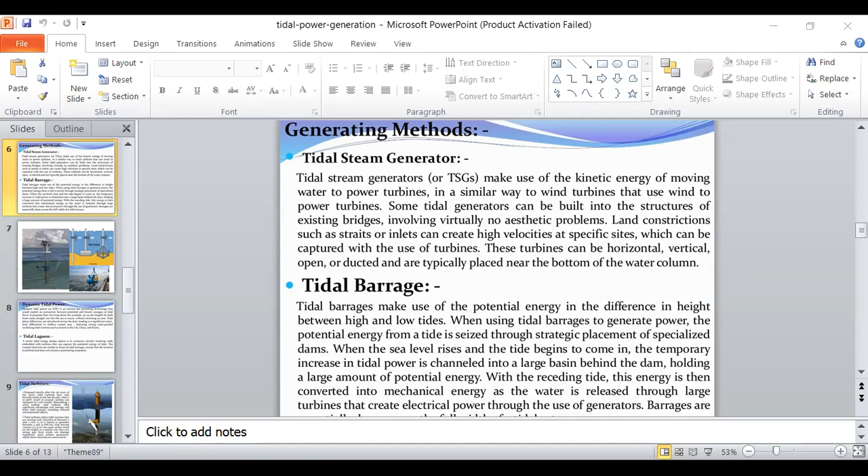Okay, who will tell me the reason behind that? So what is the reason behind that? What is meant by tides? How are tides created?

Okay, so listen once again. Tides are the rise and fall of the sea level. That means tides are the waves that are created by various physical or geographical changes happening on the earth or in the environment. That is like gravitational forces of the moon and changes in the moon and sun or lunar phases, etc. Because of these changes, the tides are created or waves are created.

Tides are nothing but the rise and fall of the sea levels, caused because of the combined effects of the gravitational forces exerted by the moon and the sun. We know that during the full moon, during the half moon, and during the no moon seasons, tides are going to change, and these factors are affecting the tides.

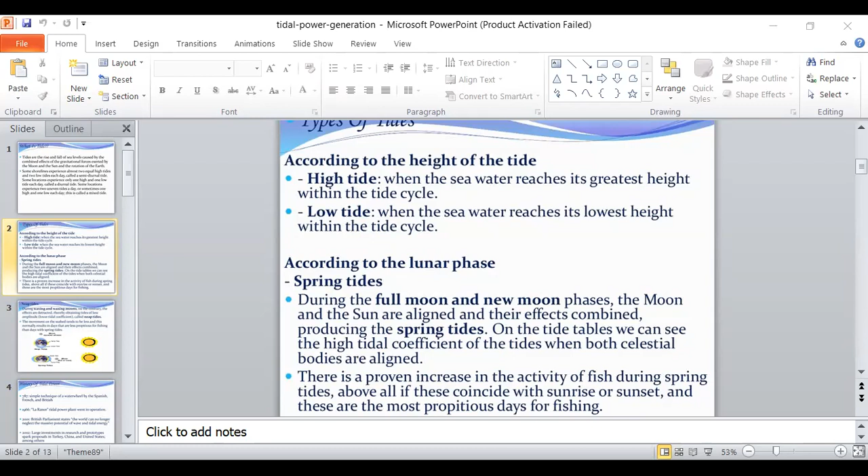The next point is the generation of tidal energy. How is tidal energy created?

Tidal power is taken from the Earth's oceanic tide. Tidal power is generated as waves flow from one side to another, that is, from higher potential to lower potential. Tides always flow from higher potential to lower potential, meaning whenever a tide is created, it spreads from the highest potential to the lowest potential, from the highest water level to the shorelines. This is the way of the tides.

Whenever the tide is flowing, the force created by that water is utilized for electricity generation. Tidal forces are created because of variations occurring in gravitational forces, and these gravitational forces are exerted by celestial bodies, meaning whatever bodies are available in space, such as the sun and moon. Because of these changes, tidal power is created.

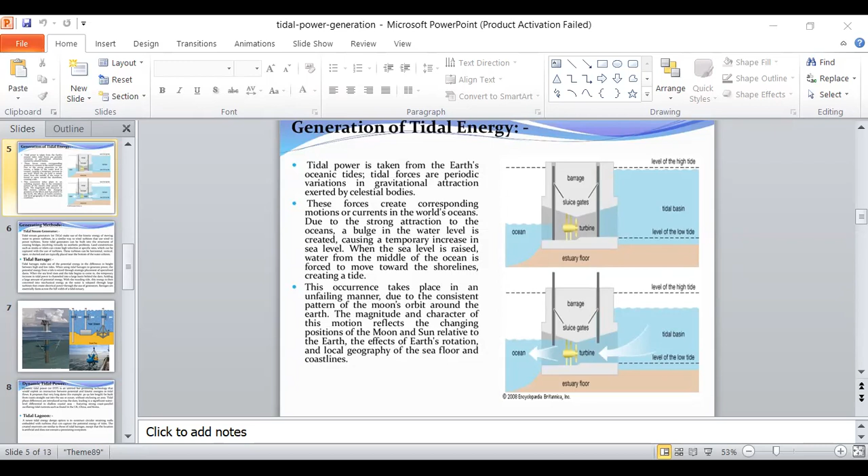So I will just show you one example so that you can visualize how stream power can be generated by using tidal energy. I will share with you one video regarding that.

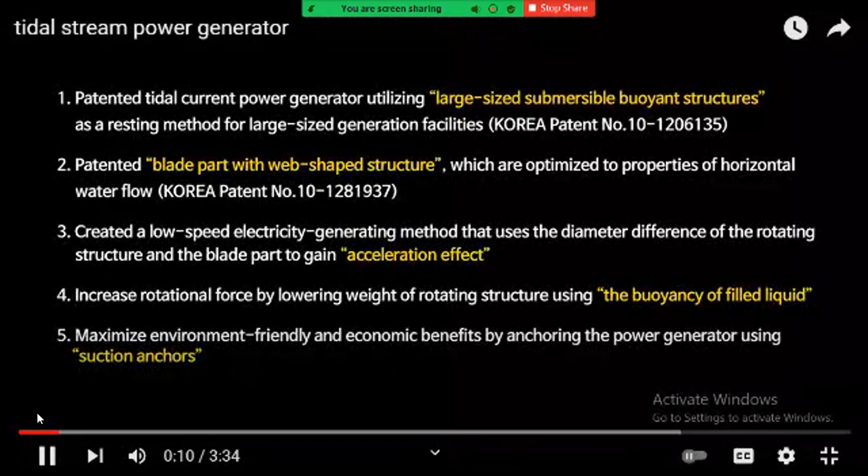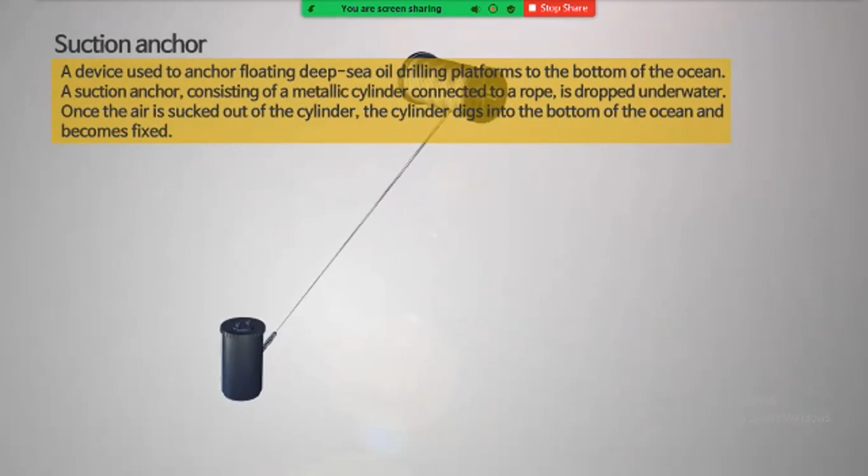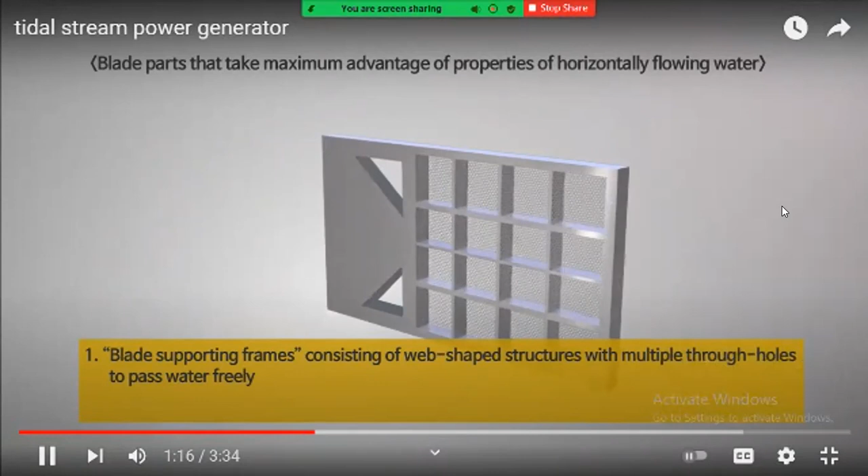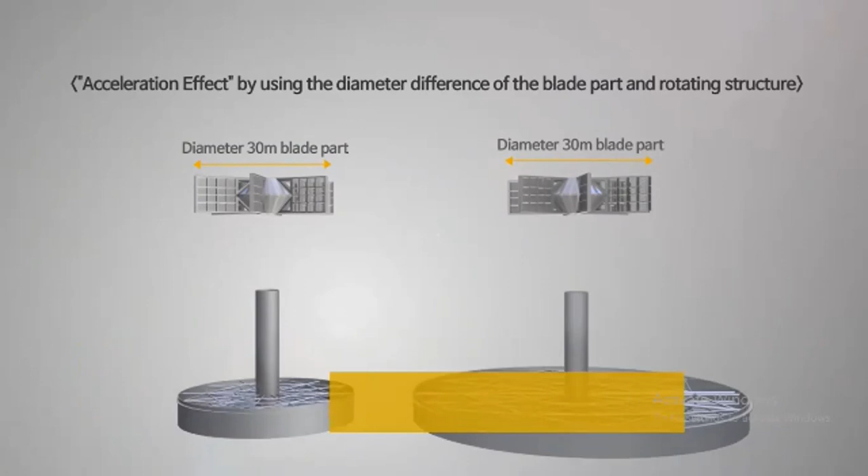Using suction anchors, BD Energy Korea's tidal current power generator is anchored, which was transported to the installation spot after it was built at a shipyard. Then, using ballast tanks, the power generator is submerged so that it produces electricity while moored underwater. The blades, designed with BD Energy Korea's patented technologies, smoothly open and close according to the flow of water and acquire rotational force with minimum resistance. By increasing the diameter of the rotating structure, it acquires the same acceleration effect without the use of a separate accelerator.

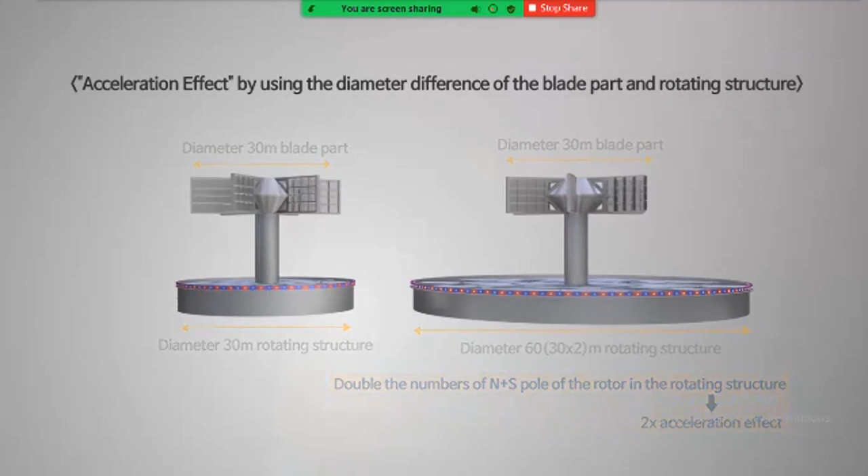Okay, so the structure of the stream generator is shown in the video. You can see how, whenever the tides are flowing, the turbine moves like this, as shown in the video.

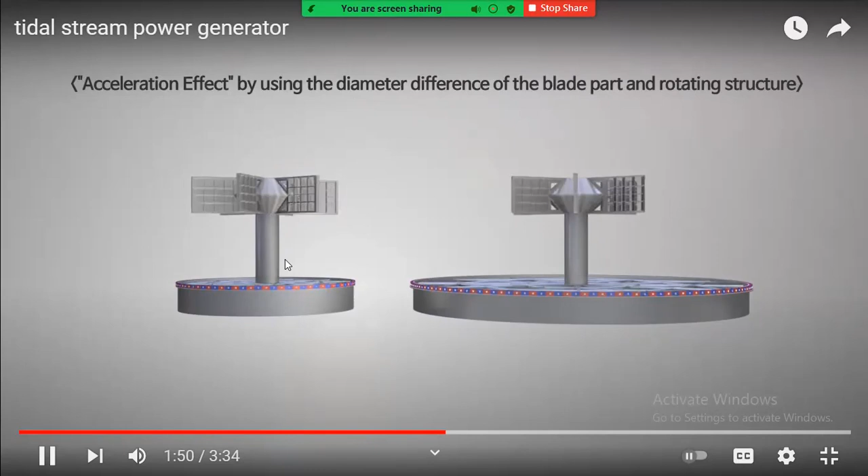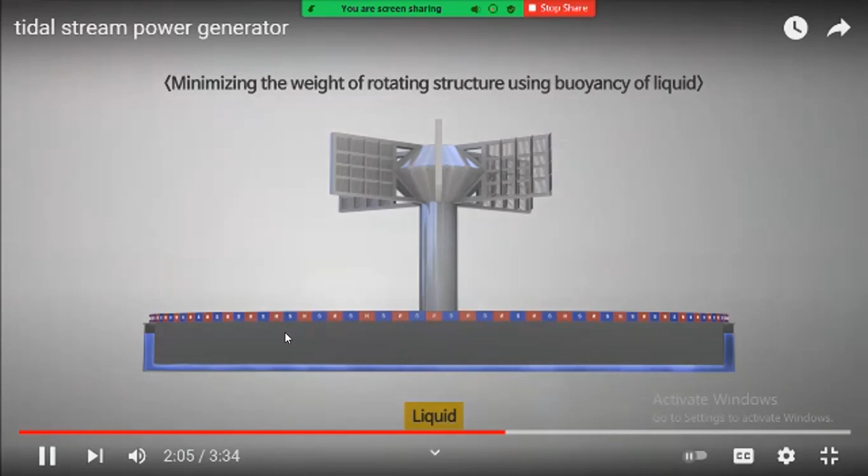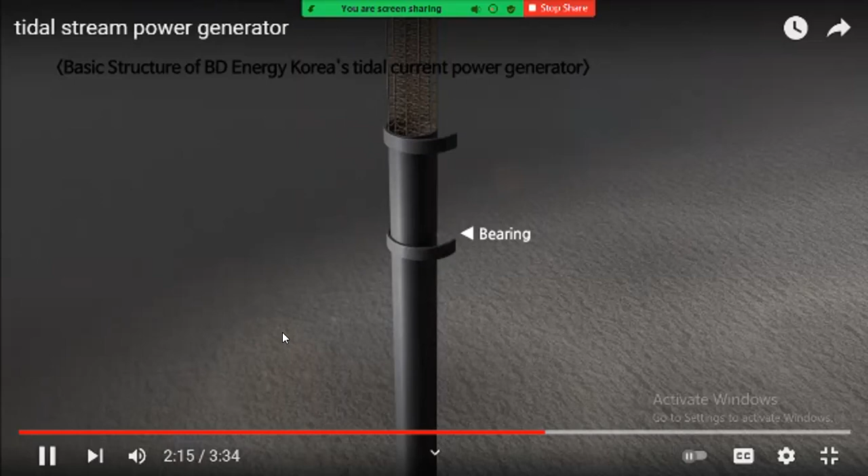To overcome the weight limitations from the increased size of the rotating structure, it is designed to be made of buoyant parts and to rotate while floating on the filled liquid. The extension axis between submersible buoyant structures serves as the support beam for rotation. Built using a truss structure, outside the extension axis between submersible buoyant structures, bearings are connected.

And outside the bearings, the central axis - okay, so the basic structure should be made like this. The central axis rotating structure should be placed inside the bottom of the water, so that a supporting structure can be created for placing the turbine.

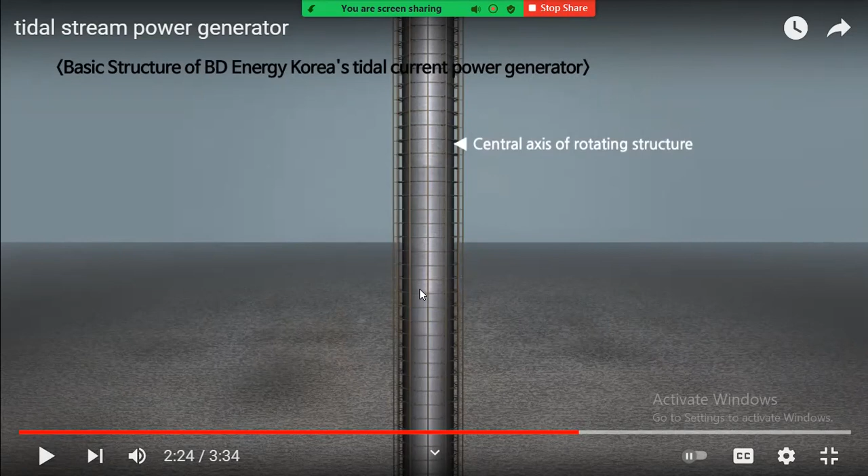The rotating structure, which consists of a truss structure, is connected. On the central axis of the rotating structure, two blade parts and the rotating structure made of buoyant parts are connected into a single structure, and electricity is generated through the interaction between the rotor and stator.

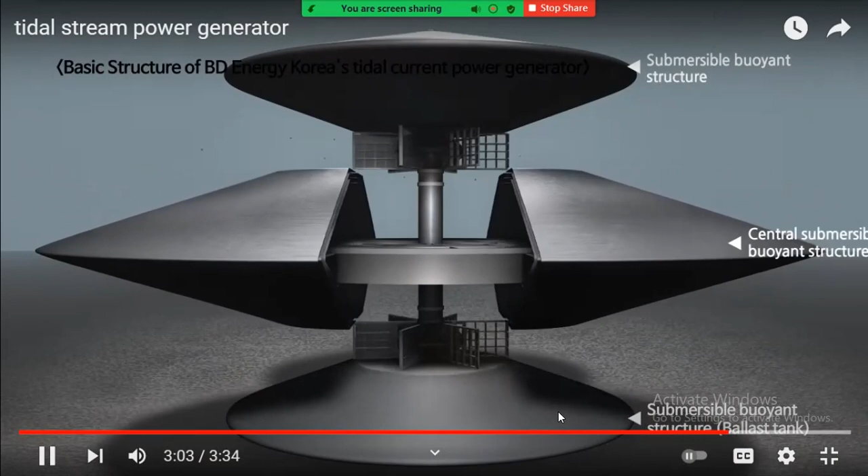Multiple pillars between - so whatever components are there, like motors or structures for further processes, those parts are enclosed by a submersible enclosure. Buoyant structures reinforce the outer structure, making it easy to increase the size of the central submersible buoyant structure.

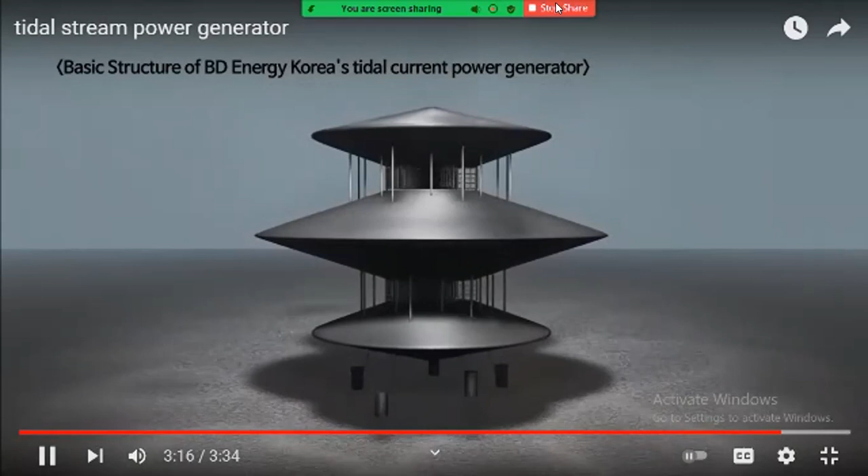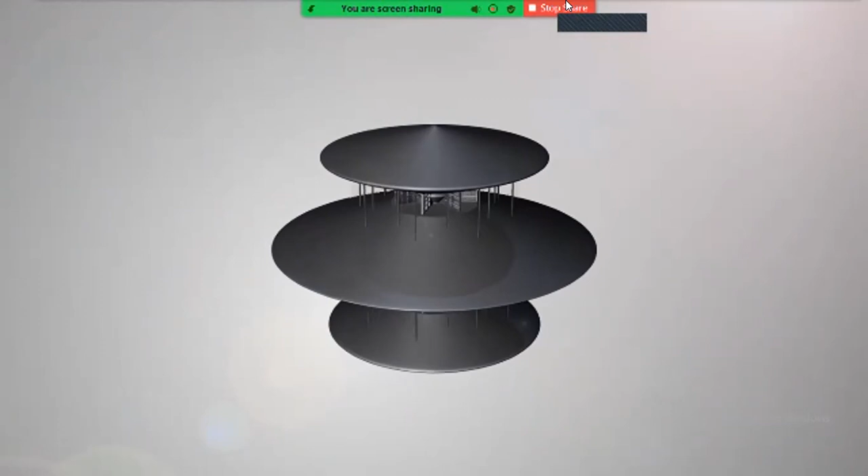A screen on the outer perimeter of the pillars prevents the infiltration of foreign matter. BD Energy Korea's tidal current power generators will become part of your life as a next generation generator.

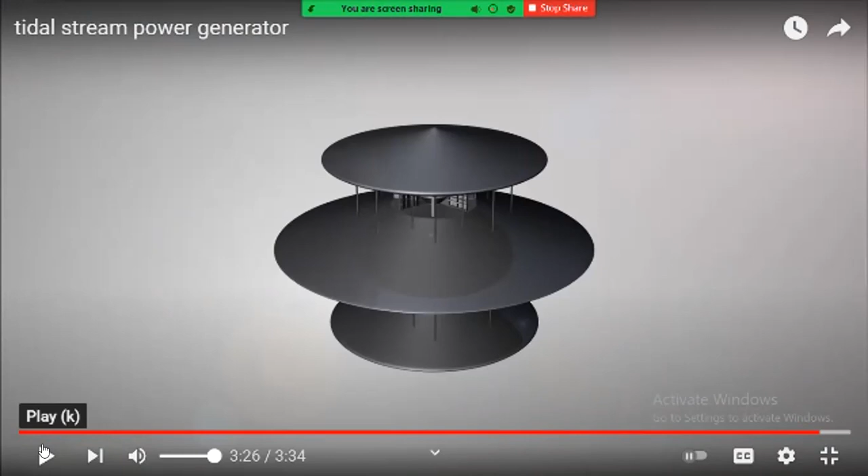So here you can see a net is connected where the water flows through this part. Whenever that net is connected, it will not harm the fishes that are available inside the water of the sea, and it helps avoid unwanted components or protect the turbine from major damage. Because of that reason, the net is connected here.

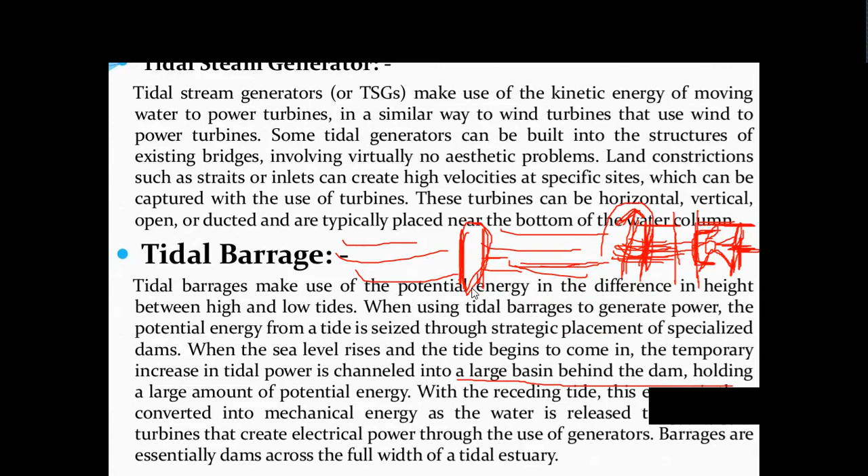So again, I will share with you one video so that you can visualize the actual process of the tidal barrage. What is the exact process of the tidal barrage?

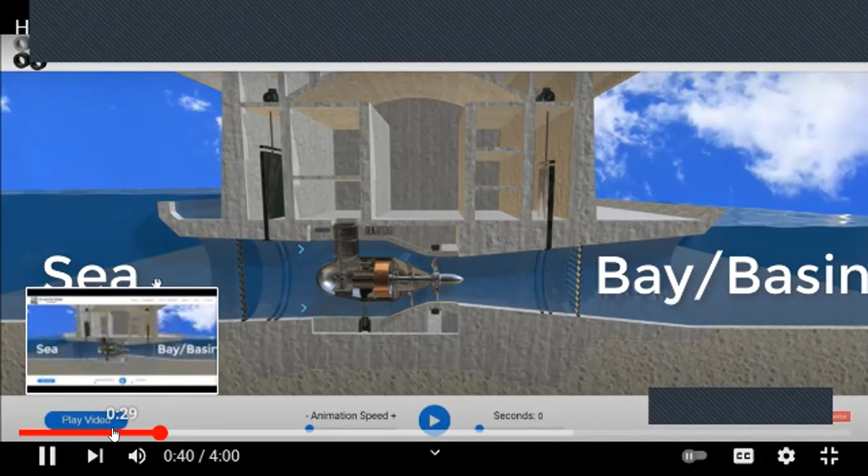There is very little flow from the seaside to the right hand side until we push play. In this image you can see seawater is stored here, and here one type of basin is created, with a barrage or structure built between them. Water should be collected at this level, and we'll see the height of the water at the left side. Whenever that water level is getting increased, this gate should open up. You can see it in the video.

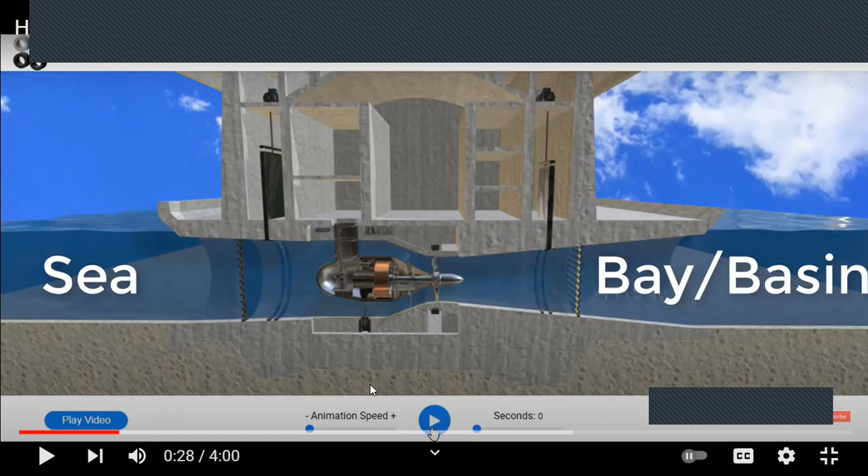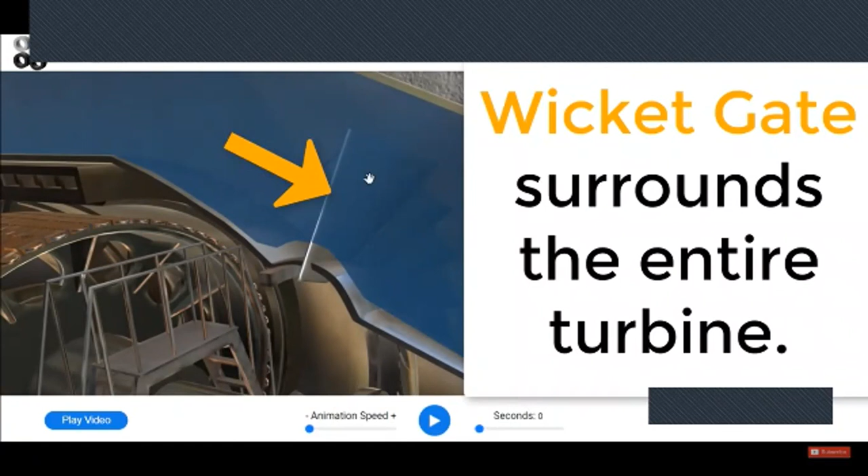Animation in action: notice the tide on the left is now increasing slightly. I'm going to pause it there. There is no flow, or very little flow, from the seaside to the right hand side or into the bay area. The reason is this wicket gate, the area just here, behind this blue piece. This is called a wicket gate. The wicket gate was closed, so there can be no flow from the sea to the bay or estuary area.

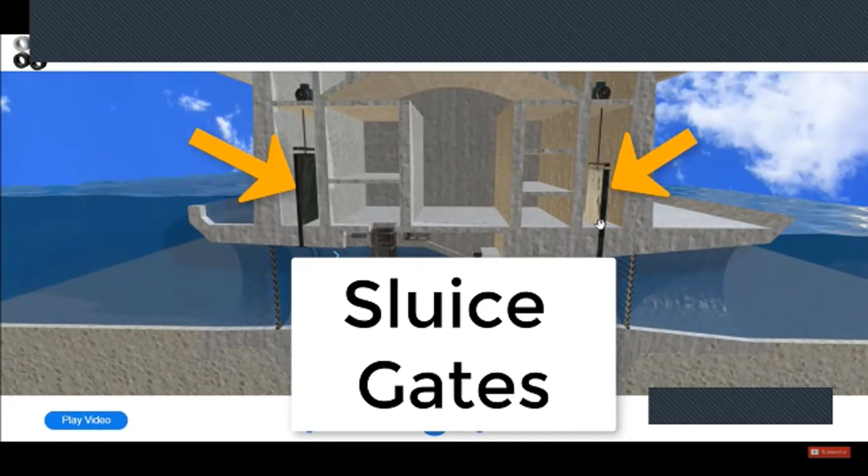Notice that you can also close these gates here; this is called a sluice gate, and there's another sluice gate on the right, which will completely isolate the turbine hydraulically, meaning there is also no flow. But the water level has increased here—it's at a higher level on the seaside than on the bay or estuary side.

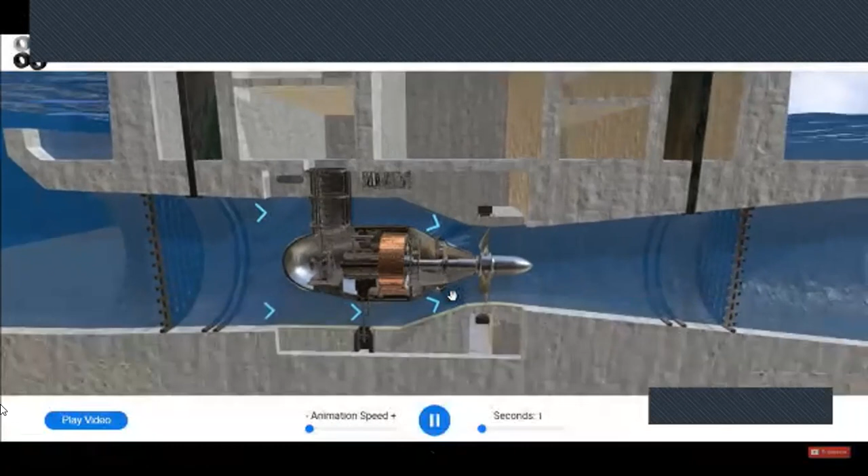If I push play, the wicket gate has now opened and we're getting flow. You can see the wicket gate here is just open, and we're getting flow now coming across. You can see here, whenever that water is flowing from the left to right, the turbine starts rotating.

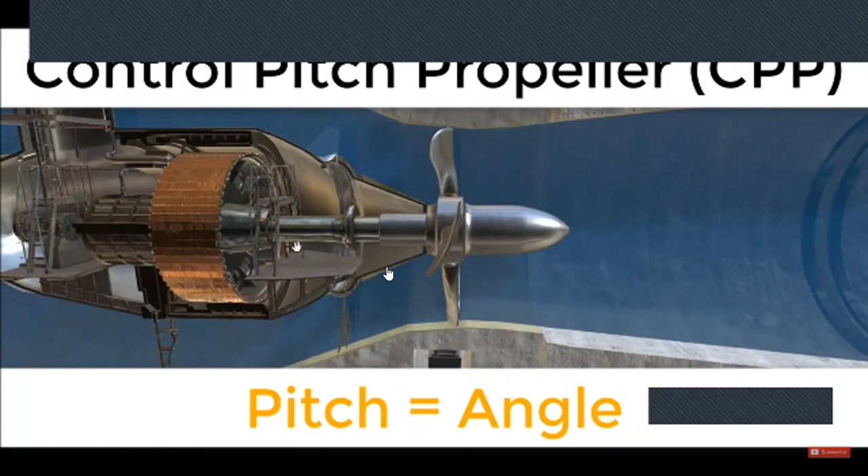This bulb turbine—this is a cross section of a bulb turbine—is imparting thrust upon these propeller blades here. This is what we call a control pitch propeller, and we're turning the turbine. The turbine turns the generator and we generate electricity. Notice these blades change position so that we can generate electricity in two directions.

The water level, I'll just pause it here a second, is now equal. The sea or tide is up, at its high point, so the tide's in and the bay is full. We can't get any more water into the bay, so the water level between the two equalizes.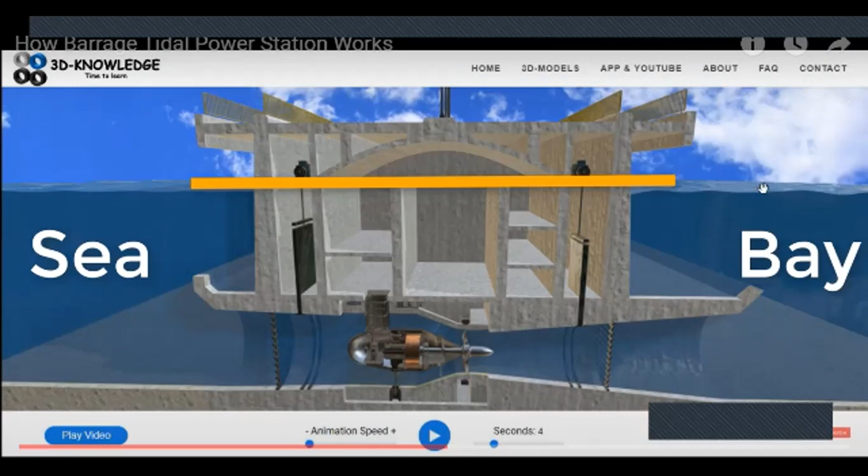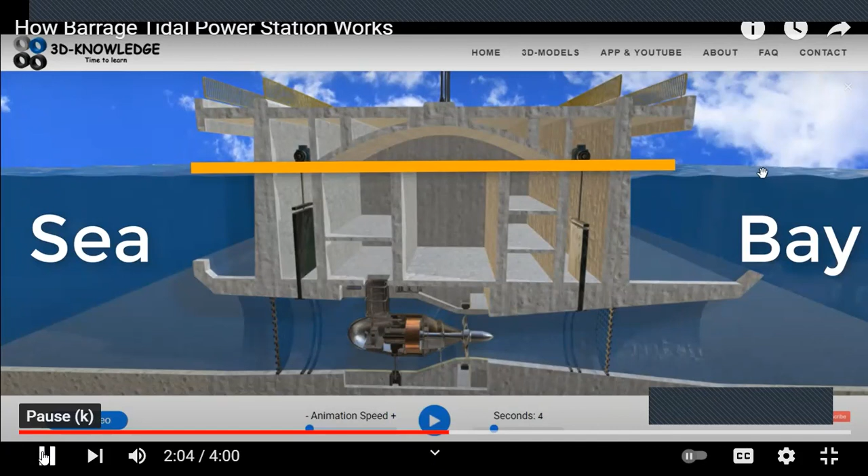So we can't get any more water in the bay. Here you can see the water level of both the bay and sea is equal, so these gates are closed and water is not flowing through them. Whenever the water level increases, either from the sea side or the bay side, and that difference is greater than about 2 meters compared to the other side, this gate should open. The water level between the two sides is equal, so there's no flow because there's no pressure differential between the two sides.

However, once the tide begins to recede on this side, we can leave the wicket gate closed until there's at least 2 meters difference in height or head of pressure between the sea and the bay area. Once we have that 2 meters, that's sufficient flow to drive the turbine, impart thrust upon the blades, drive the turbine and generate electricity.

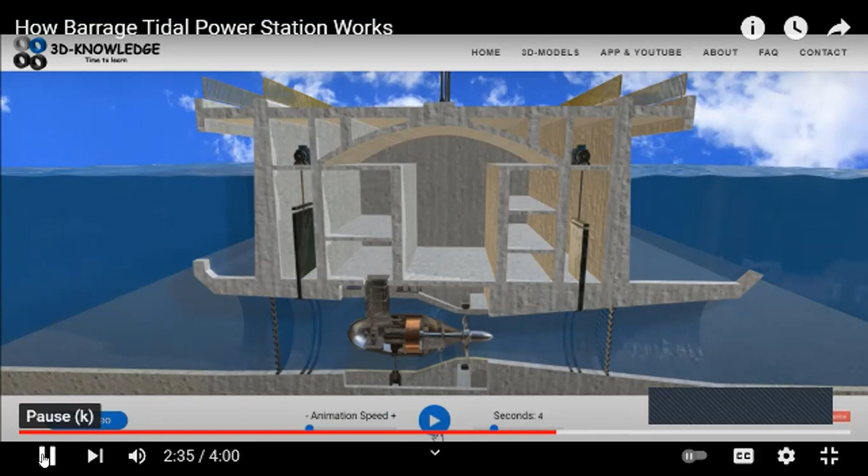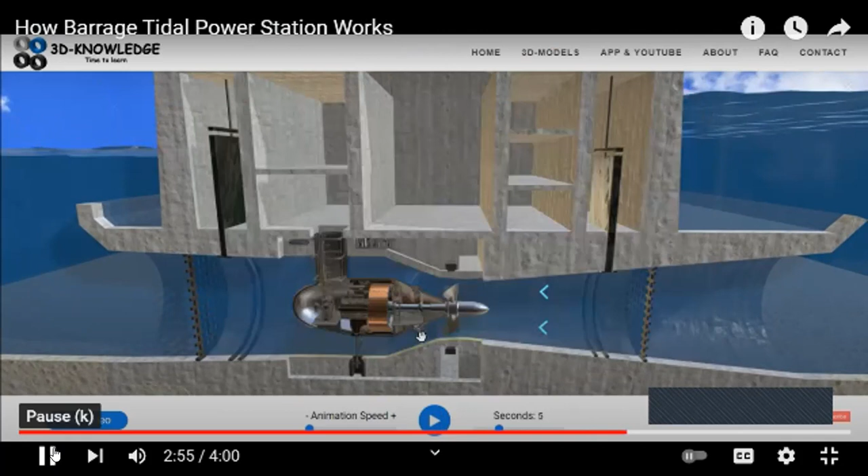Let's play the animation again. Hopefully in a minute we'll see the water draining out from the sea side. Here we go, it comes down. Notice there's no flow. Keep an eye on the wicket gate. The wicket gate is now open because there's sufficient difference in height between the two levels, meaning sufficient flow will occur once we open the wicket gate. The blades should also be adjusting position.

We'll see that now. Notice they're spinning around. This is because we want to impart maximum thrust onto the blades as the water's flowing across, and to do this we have to adjust the position of these blades. That's why they call it a control pitch propeller — when you adjust the position of the blades, you're adjusting the pitch.

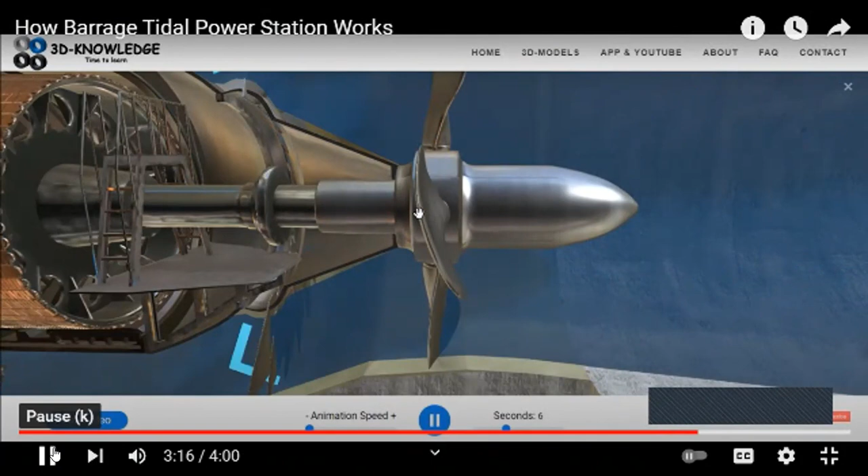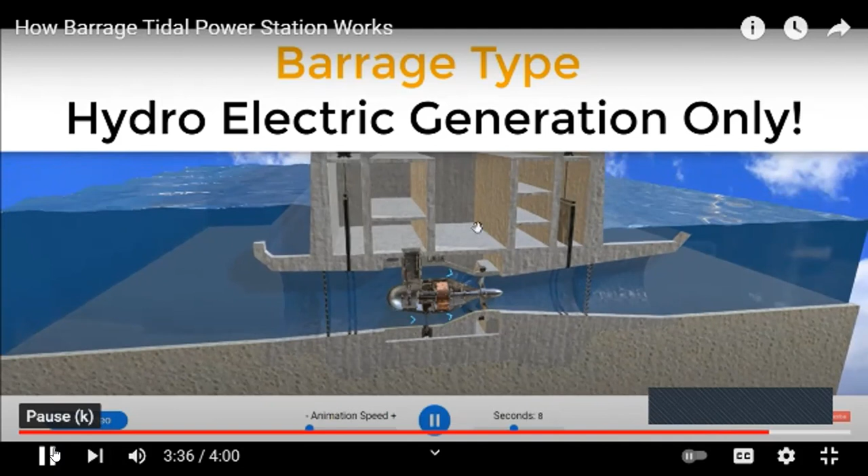Again, the flow has stopped because the water level on the two sides is equal. You'll need at least 2 meters difference between the two sides to generate electricity. That is essentially how hydroelectric generation works — a relatively simple process. You're artificially controlling the difference in height between the two water levels in order to get a high flow from one area to another until the pressure is equalized, and then we use that high flow to generate electricity.

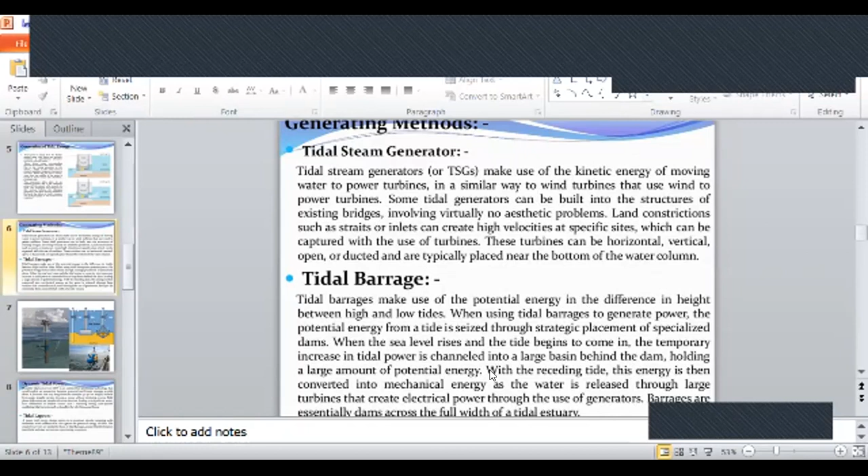Okay, so this is about the tidal barrage you've seen in the video, and an explanation regarding this has also been given to you in the study session. If anyone has a query regarding this, they can ask me. Is anyone having a query?

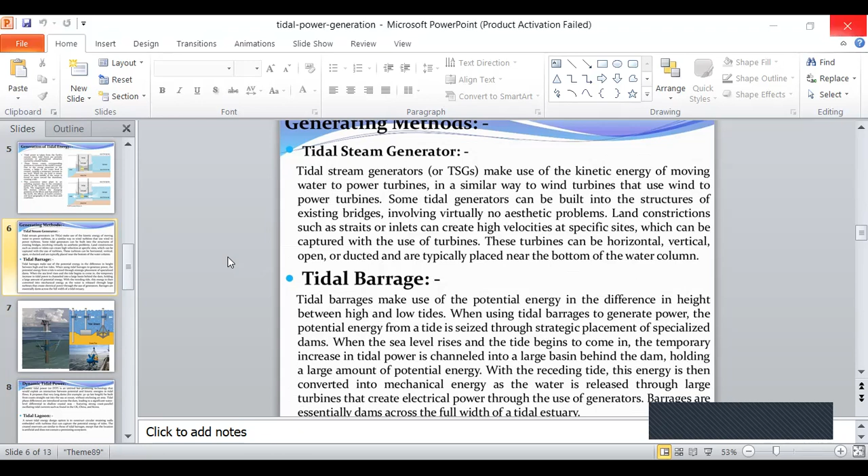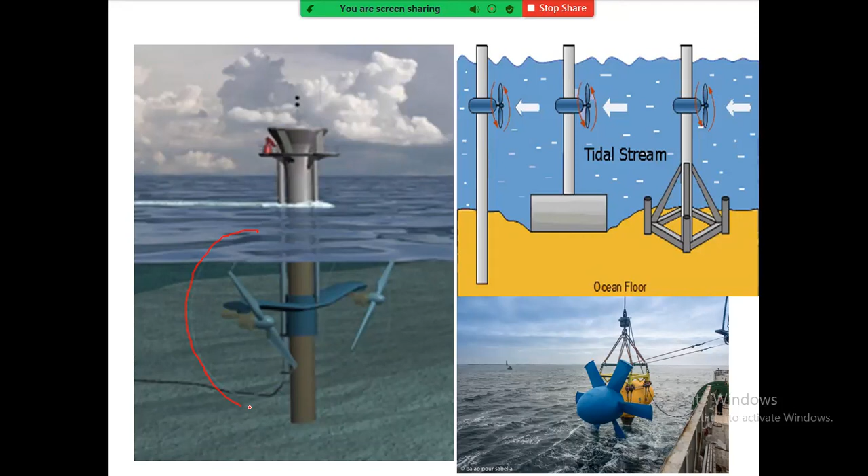Okay, so in this image you can see here the images of the turbines are shown. Various types of images are here. Multiple numbers of turbines are connected here. So these are the turbines, and they are rotating according to the pressure that we are getting from the tides. Various types of examples are shown here in images.

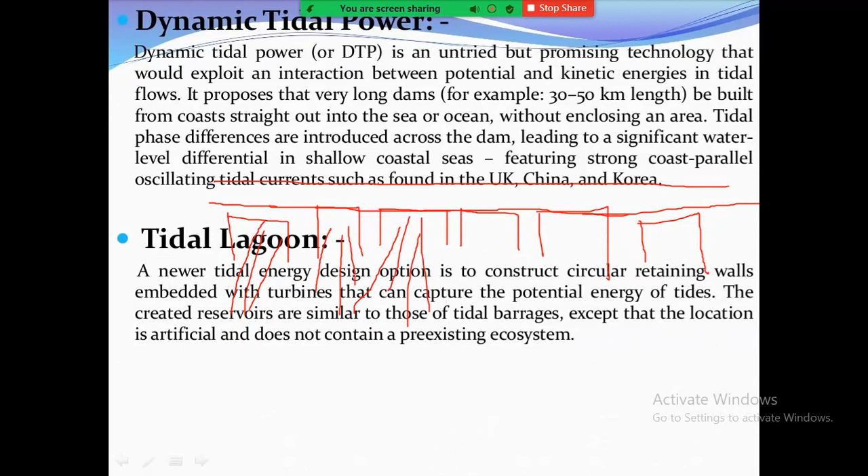Okay, so the next type is dynamic tidal power. Dynamic tidal power is similar to tidal barrage. One type of barrage is created, but instead of putting one door, here multiple doors are created. Suppose this is the barrage created on the ocean — some construction like an overhead bridge is created, and through these doors water is flowing. Multiple doors are created here. Water is flowing from one side to another side, and at this structure turbines are placed.

Multiple turbines are connected here. Whenever water is flowing from higher potential to lower potential, these turbines get rotated, and a maximum amount of energy can be created by utilizing this type of energy generation method.

So this is the only difference between barrage and dynamic tidal power. In the case of dynamic tidal power, for more power generation, wind power plants can also be placed here. A wind structure can be lifted here so that maximum amount of power can be generated.

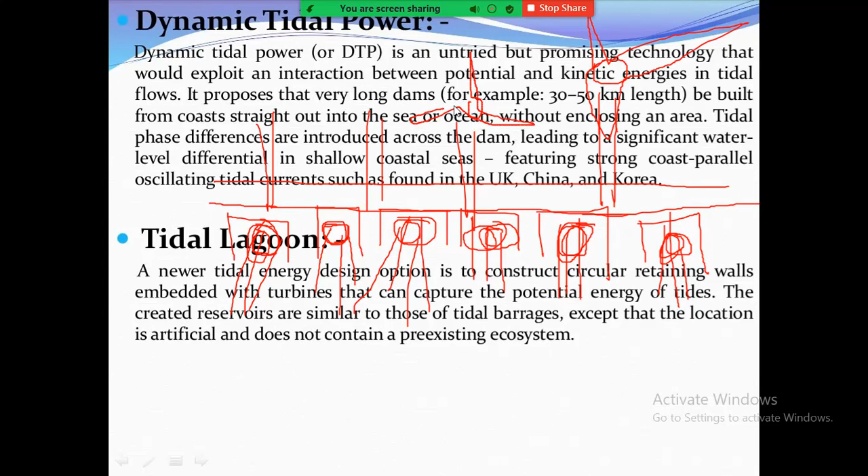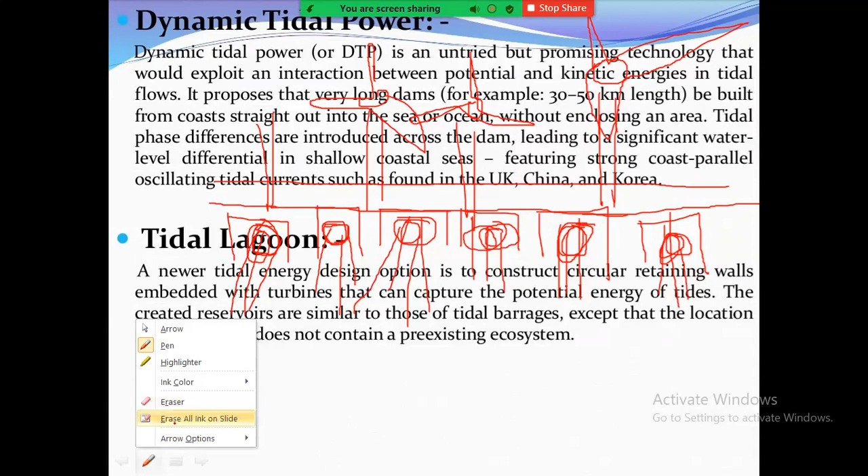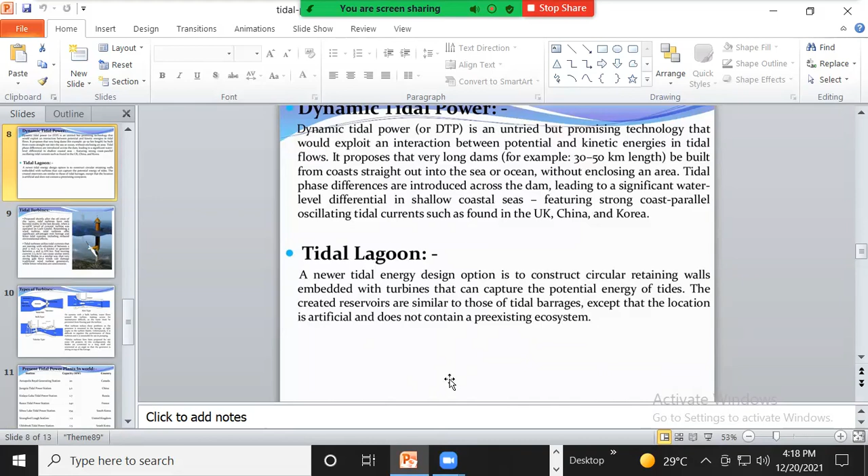Okay, so again I will show you one video regarding dynamic tidal power so you can understand how exactly it works. So what is the difference between all the generation methods? What is the difference between tidal barrage and dynamic power generation?

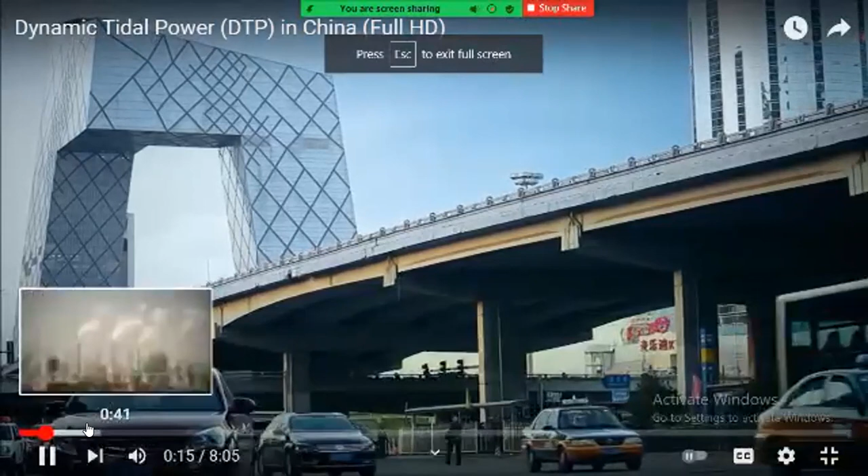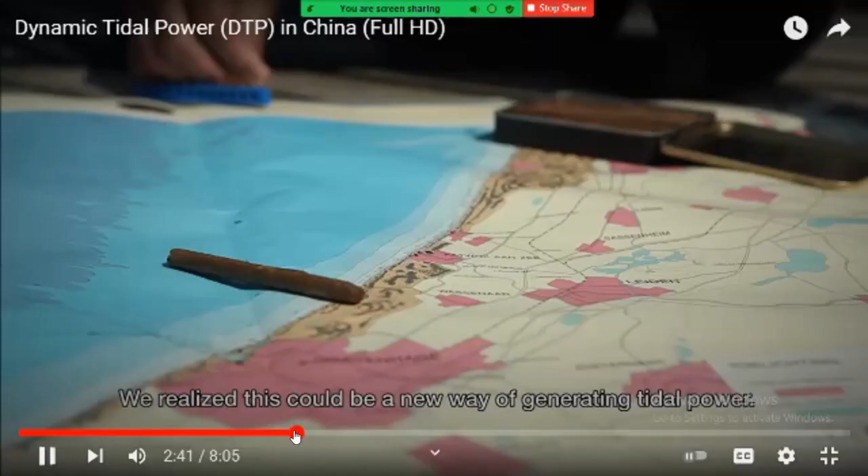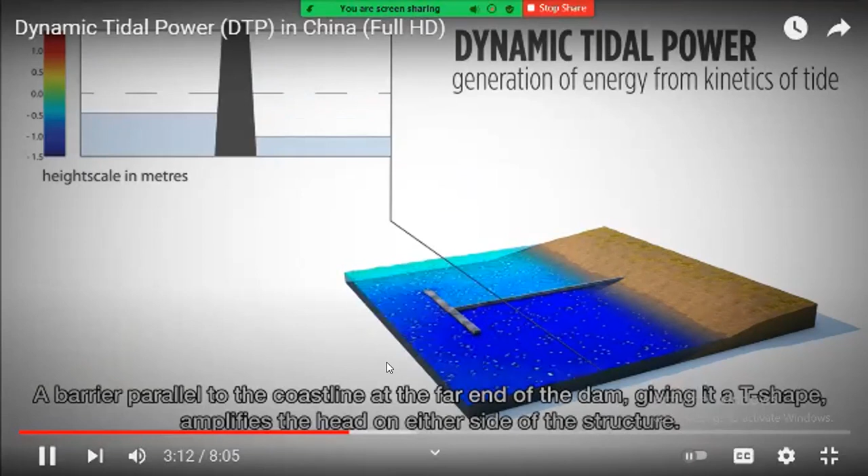The head on either side of the structure. This hydraulic head, together with the shape of the tunnels...

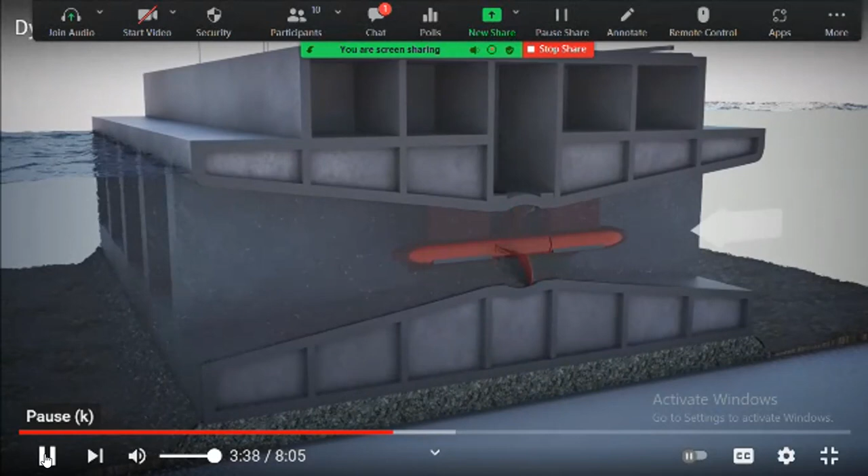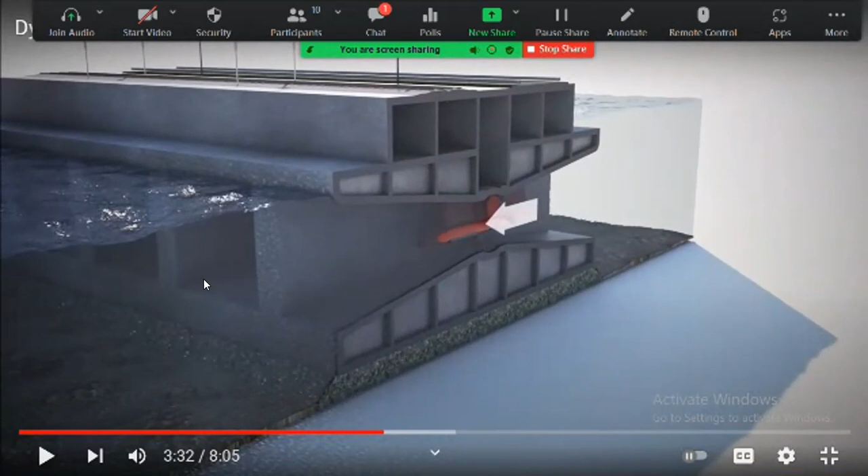Marcel Stive, here exact working is shown here at this case. So same structure like this is made at this part also, at this part also.

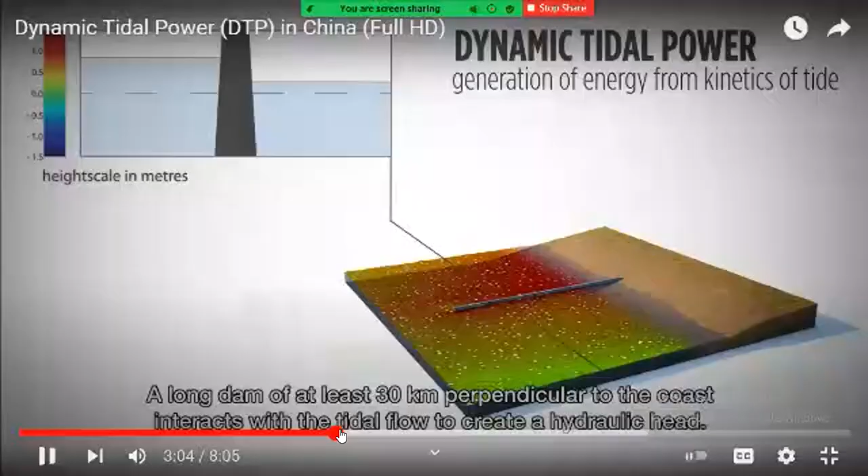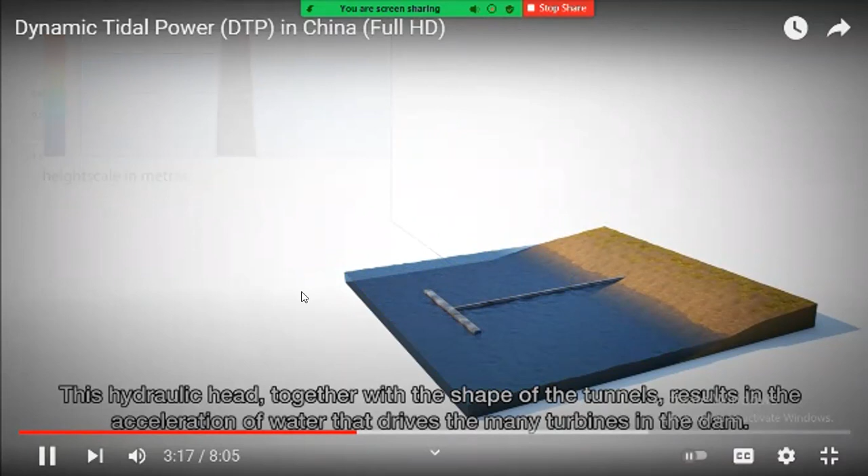A barrier parallel to the coastline at the far end of the dam, giving it a T-shape, amplifies the head on either side of the structure. This hydraulic head, together with the shape of the tunnels, results in the acceleration of water that drives the many turbines in the dam.

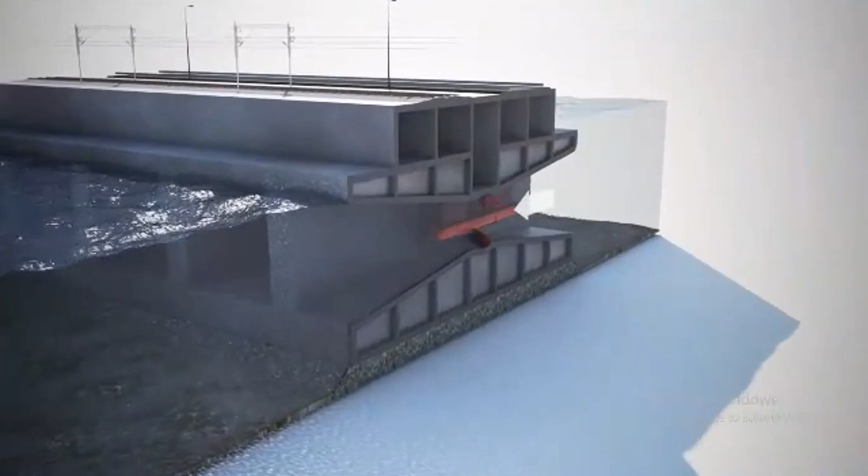Similar to the above structure, a tidal lagoon is like this. So here you can see the tidal lagoon structure.

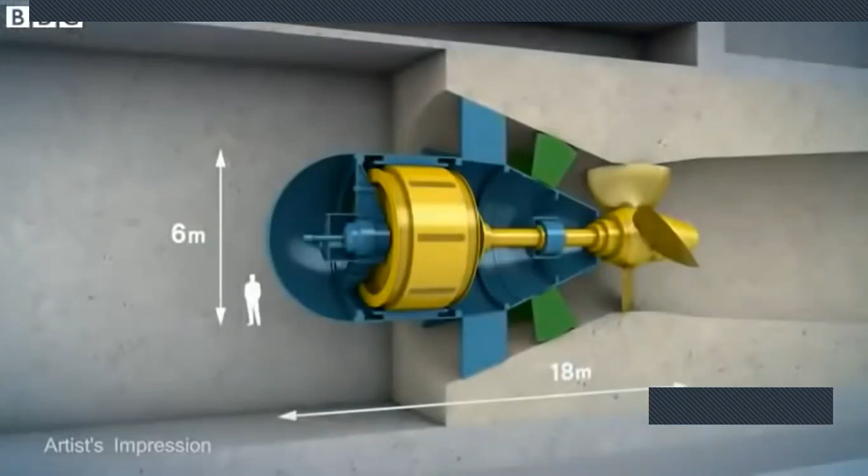Of water into a lagoon here in Swansea Bay. Large power generating turbines will be set in the sea wall.

Here's how it works: similar structure. On the left here is the open sea, its height increasing from low tide to high tide. Of the multiple sea doors, only one door is placed here, and inside that door a generator or turbine is placed. The generator is connected with the turbine.

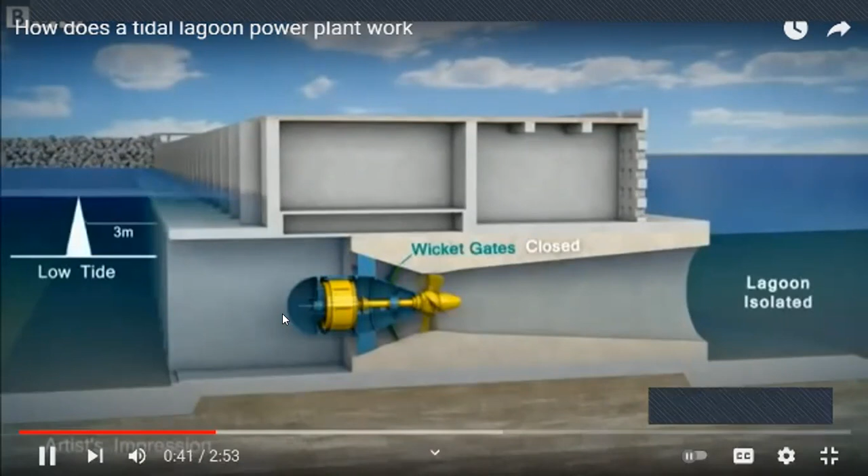The wall holds the rising tide out of the lagoon on the right. Then a wicket gate is opened to let the high tide flow in. That makes electricity. When the lagoon fills up, whenever the potential is created, that means the high tides are created, or low tide...

During the low tides, this turbine is not flowing, not rotating. Whenever the height of the tides increases, at that time this turbine starts spinning or rotating, the tide goes out, and the whole process is reversed to make energy once more.

Whenever the water level becomes equal, the turbine stops working. Whenever a potential difference is created between the two water levels, at that situation the gate should be opened so that water can be passed from the higher potential toward the lower potential.